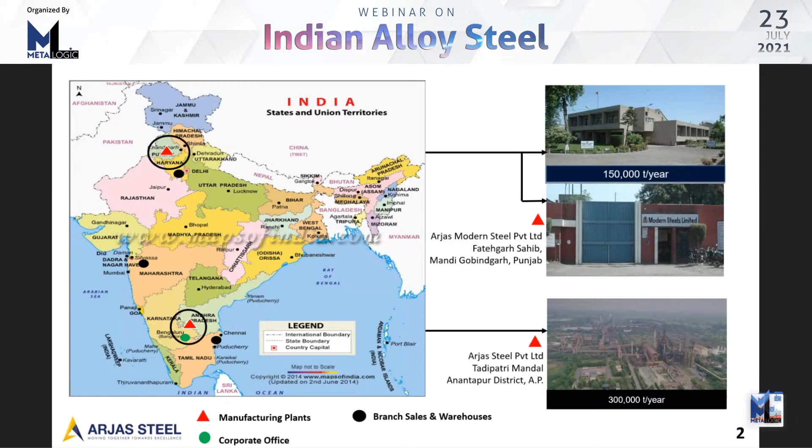So we use scrap as the raw material. Combined, although both plants are not yet at those levels, the rated capacity is close to 450,000 tons. Combined, we have a range of products—some overlapping, some unique to each plant—including rounds, RCS, hexagons, ingots, bright bar, and heat-treated bars.

Combined, we have about 2,500 people.

As is required for this business, we need to have strong systems-oriented ways of working. So we have all the typical systems you would find in most companies, either our customers or our peers—good management systems, traceability, quality, root cause analysis. Increasingly, in the last 2 to 3 years, we've been increasing the amount of digital solutions to make our business more efficient.

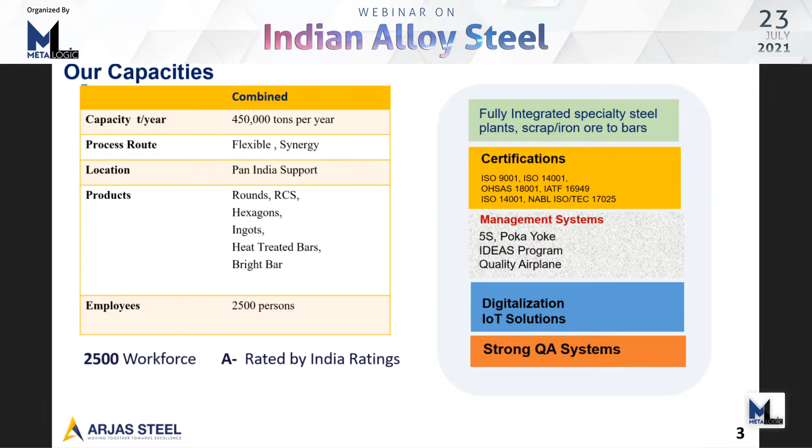In different areas, we have implemented IoT solutions which tackle specific problems in operations. Coming to products, you can see some of the products that we make.

We have a range of products. Of course, we don't cover the entire range of what the alloy steel world is—that's due to some technical and other limitations, but increasingly our aspiration is to grow that profile. On the right, you can see some of the applications where our steels go.

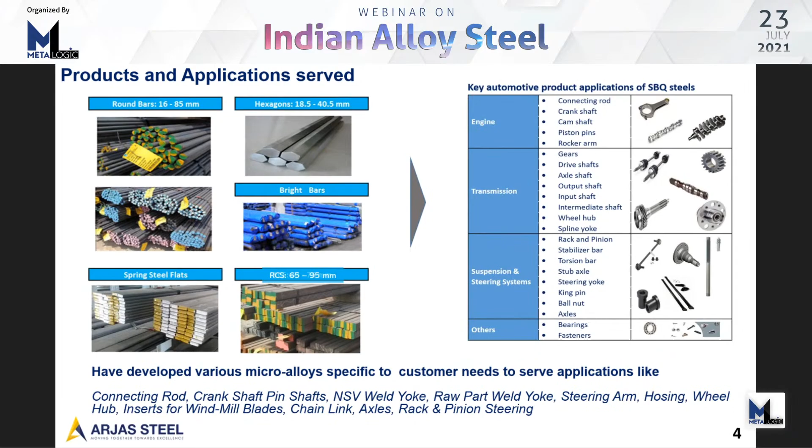Apart from automotive applications, we also have wind energy, certain foundation bolts, and some other engineering industries like textiles where we have special steel needs. This is going to increase as India gets more quality conscious and products become more sophisticated—alloy steel applications will increase across metros, infrastructure, etc., and defense.

Coming to the industry, give or take, India produces 100 to 120 million tons of steel, and year on year we vary between 80 to 120 depending on the situation. We export and import approximately equal amounts—around 9 million tons of exports and about 7 million tons of imports. The last couple of years have been fairly good from an import perspective because we have brought in minimum pricing and certain protection for the local industry.

So we are to some extent shielded, but more than that, globally steel is going through a good cycle. In all the countries that typically imports come from, prices there are also equally attractive, so import of steel is less. But in a little difficult market condition, there's a lot of steel that finds its way to India.

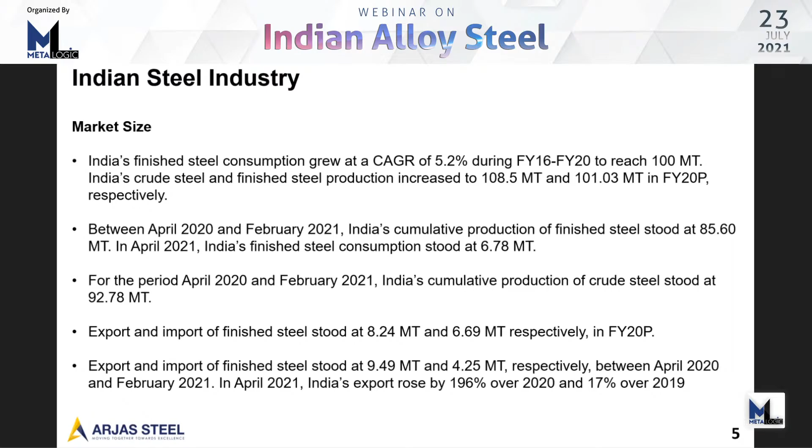Among this 100 odd million tons, roughly 4 to 5 million tons, probably closer to 6 now, is what we call special steel. This covers also a little bit of stainless, also alloy steel flat products. So if you take the products that we have—I have another slide that talks about that—we are talking about 4 to 5 million tons. Now, in the last few years, the government has been fairly proactive.

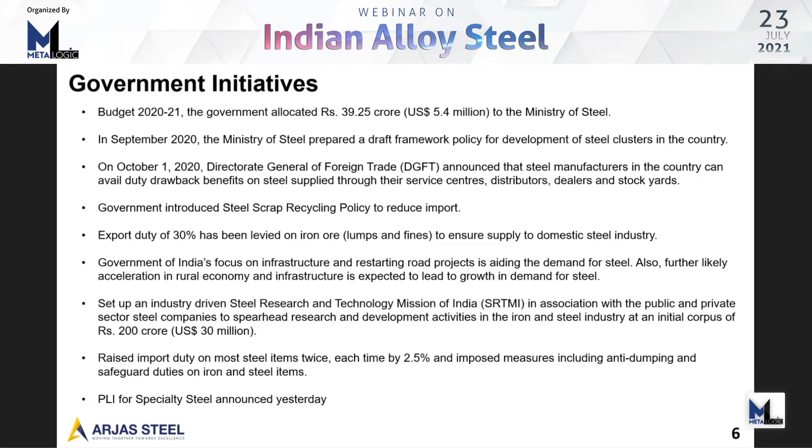I think there are other speakers who will talk a little bit more on the policies, but definitely they have been consulting with the different industry associations and taking proactive actions to promote local production and local consumption, and also go up the value chain. Among these, the two most attractive policies from an alloy steel perspective are the emphasis given through SRTMI on developing R&D activities to improve our product development capability, and secondly the PLI scheme announced yesterday, which talks about import substitution. So essentially these two are good building blocks. The rest, export duty, import duty, are more tactical and can tomorrow go away, because we do have to adhere to World Trade Organization and other principles.

Coming to the market, definitely the automotive market - what you see in the red line is last year's monthly trend, and in the blue line above that is the current year, April, May, June, 3 months. We are trending well above last year's numbers, and if you see last year's numbers overall we have done well, especially the last second half, compared to even 19-20.

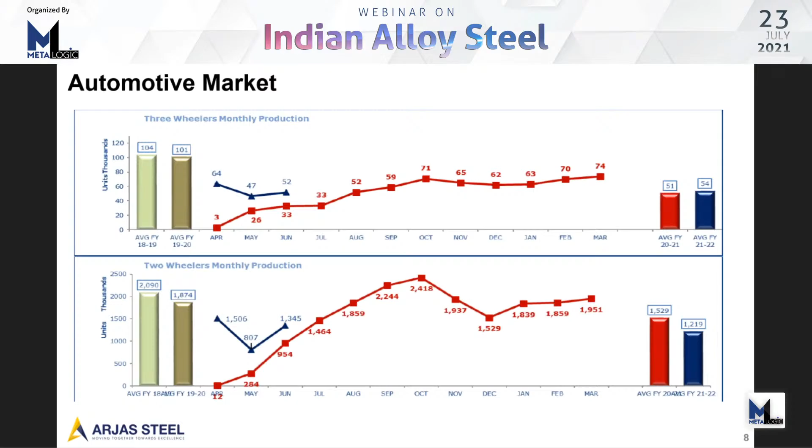Commercial vehicles has been a little slower off the mark, but as economic activity improves, we expect commercial vehicles to accelerate. Three-wheelers, which is predominantly an export business, has to some extent been impacted by the lockdowns and closure of schools and tourism, and is not doing as well as two-wheelers, which has performed extremely well. This year as well, after the dip in May, it has again bounced back. So we are seeing very good traction in the auto sector, especially PVs and two-wheelers.

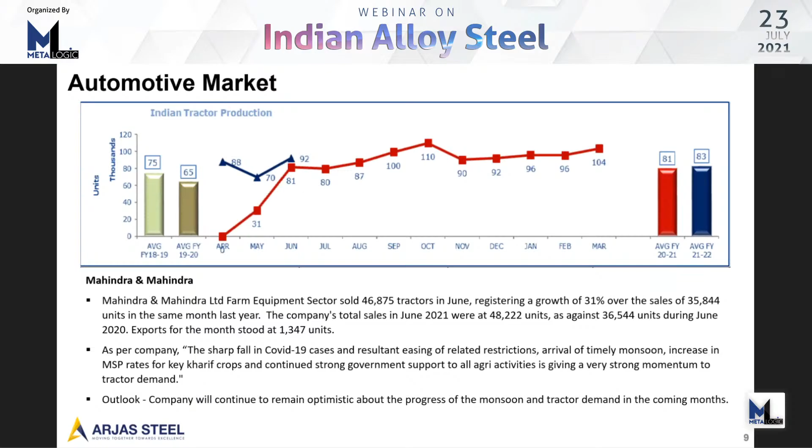The farm sector has been extremely good, and tractors has seen phenomenal growth month on month. Last year was a very good year, and this year is continuing to be equally attractive as rural demand picks up, and rural urbanization and rural transportation also happen with tractors. Tractor is no longer just an agricultural application, it's also being used for multiple other purposes.

So the Indian SBQ market that we are in is 4 to 5 million tons. Half of it is automotives, energy - mainly wind energy but also boilers and energy systems - and off-highway vehicles, not only tractors but also earth movers and other equipment. Railways is a smaller portion, and defense is even smaller. But generally speaking, in all these sectors we have strong policies in place, and as long as we are not hit by further pandemic shocks, I think we are in for a good run.

Energy sector, again, there's been a lot of thrust, both in generation and in transmission, and the current budget forecasts a good amount of expenditure in these areas. We are already seeing in energy a significant benefit from power availability, but in the transmission areas we do have certain issues, especially in Punjab, where we are experiencing some difficulties, but by and large this is expected to improve. Along with that, you will have growth in special steel requirements as well.

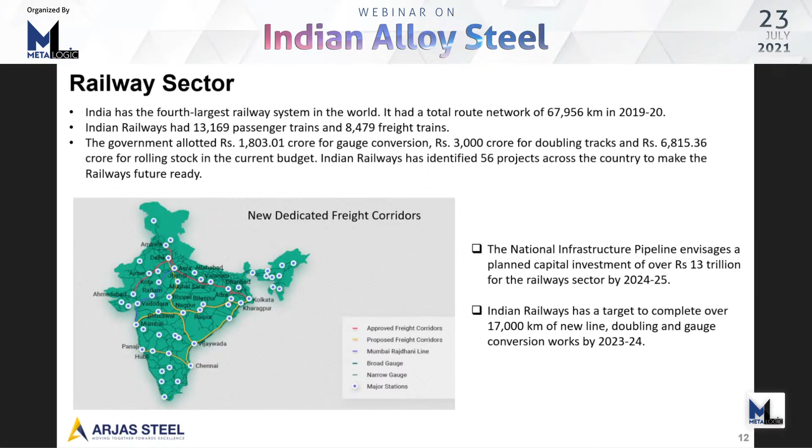The railways, again, is on a growth phase, both in terms of coaches as well as the springs and other things required for the coaches, where our special steel will go. There's an ambitious target to expand the coverage of railways, new railway lines, and also doubling, and also going to high speed.

Sorry to interrupt, you have 1 minute to go, sir.

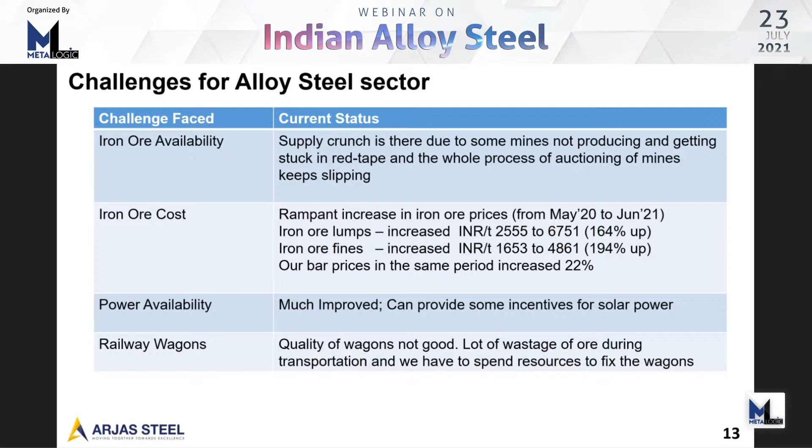Sure. So in terms of challenges, there are definitely challenges in terms of availability and pricing for iron ore, which is one of our important raw materials, and also scrap. You can see raw materials have jumped by over 100%, and the finished products have gone up only 22%. Although it may seem there have been a couple of increases, in real terms the price increase has been only less than 25%.

What we look for in this alloy steel sector is we need more forums like this to exchange best practices, and we also have a shortage of skills in certain areas. We need upgradation of that. And in terms of digitalization, we need to educate our workforce as to what are the potentials out there.

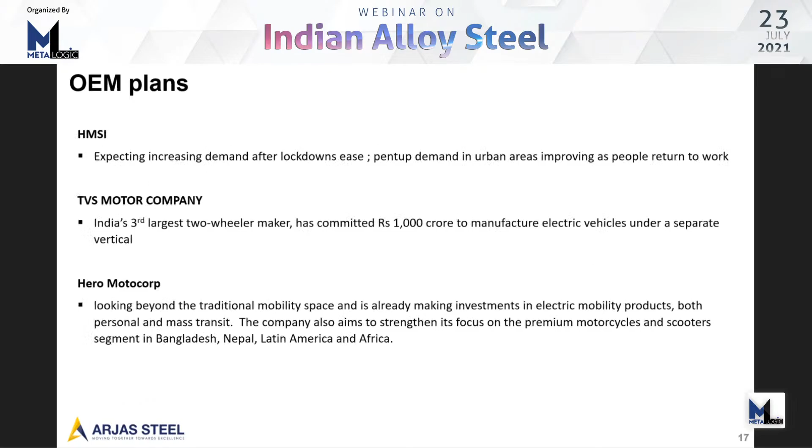I have a few slides here on various OEM plans, which I'll be sharing later on through Metalogic. But I'll just come to this last page. So the positives are it looks good in the short term, meaning 21-22 year. We are looking at a good year going forward. We are also looking at these initiatives given by the government, which should encourage new capex to come in.

And of course, the worries that we have are the pandemic. It's still not out of our system. And this is also impacting the supply chain, as well as the availability of raw materials is an issue. And of course, prices - how much of that we can pass on to the customer is also a concern. But overall, I would say on balance, we are looking at a good couple of years. And if we can manage our operations well, I think we are in for a good run.

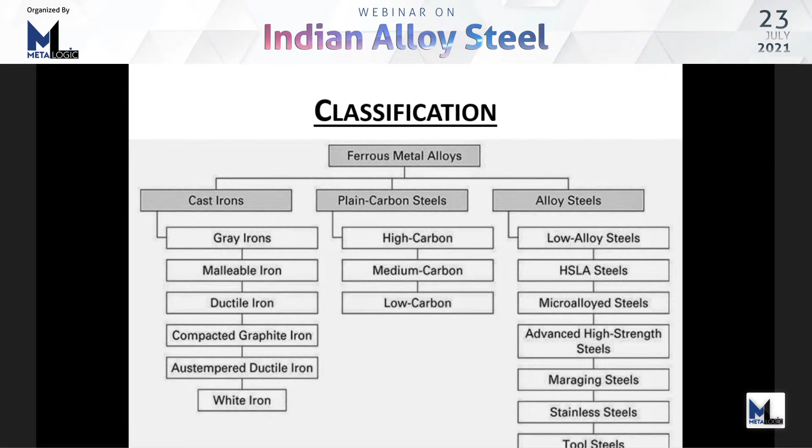This audience is well known about alloy steel. In fact, alloy steel has a wide domain, right from carbon, which is also called an alloying element. And if you see the category, it even includes cast iron, which can be termed an alloy steel. But what we are discussing is the extreme right-hand side: alloy steels, mostly low alloy steels, high strength alloy steel, then micro alloyed steels. So a lot of changes have come in the alloy steel category, and that's why this topic has become very interesting and a very high value area also.

Let's run through the applications of different alloying elements. Today when we talk about steel, whether primary or secondary steel manufacturing, mainly the basis is that alloying elements have given a big thrust to the application of steel. Some of the important alloying elements are tabulated here, and it broadly shows what changes they give in the properties.

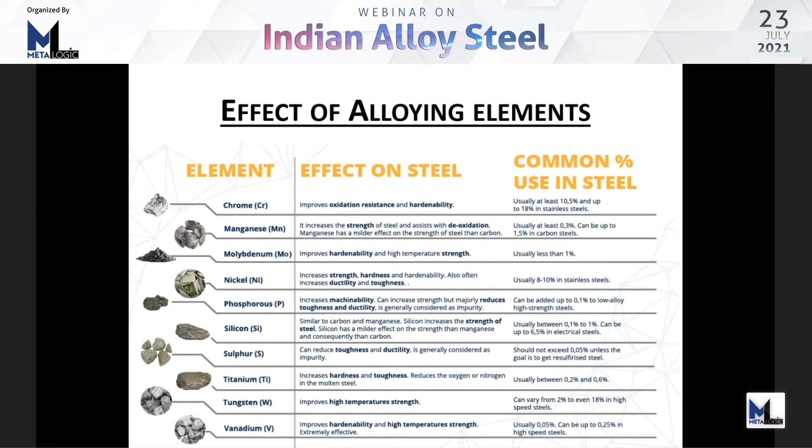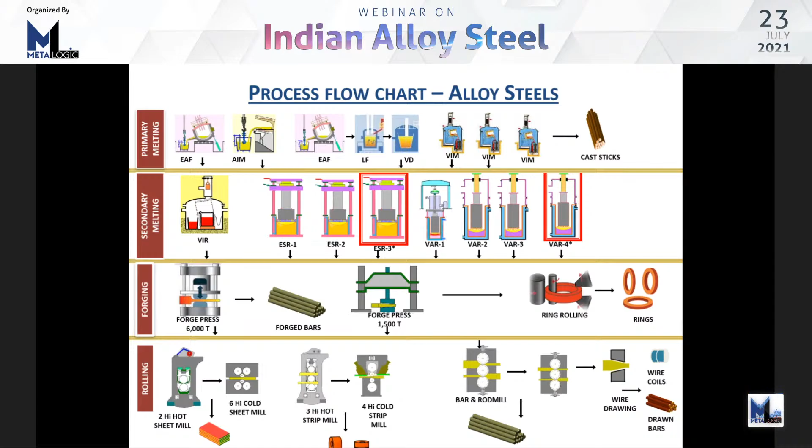Very broadly, this process flow chart I have shown here includes electric arc furnace, vacuum induction melting, air induction melting, followed by different types of VIM, then VAR, and then the downstream process of manufacturing, which is also very important—what process you follow, what is the heat treatment process. So these things are already shown here, and we have tried to cover the entire primary melting, secondary melting, forging, rolling. All I am trying to focus on here are the very specialized grades of steel which have applications in space, defense, aerospace, and other strategic applications.

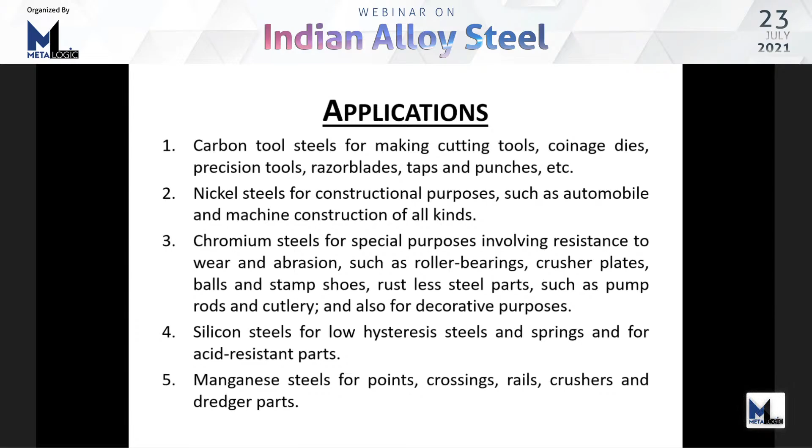As already given by our previous speaker about the different applications, I'm not going into that category, but broadly, the areas where the commercial applications go for, we start from tool steel, then construction purposes, then automobiles is another major application area. We also have certain steels like chromium steels used for roller bearings, and some for crusher plates. So what we are trying to see here is that steel has such tremendous applications, from very small cutting razor blades to very high-end applications, which makes steel very special. As you will see from different speakers, its importance and application is quite big across different segments of our manufacturing industrial process.

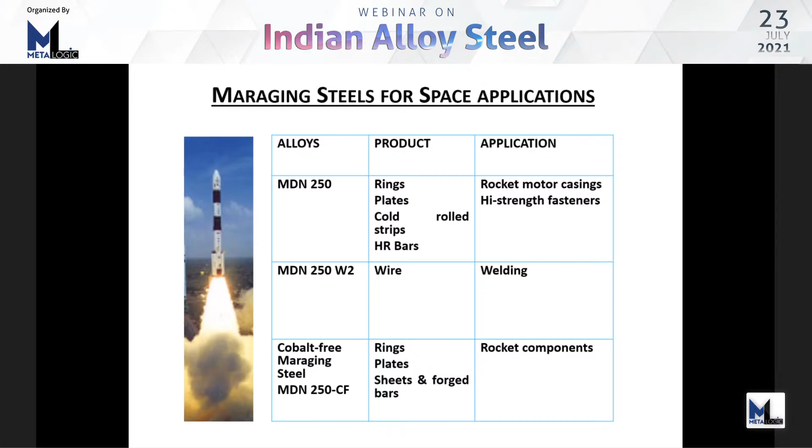Similarly, focusing on other grades of stainless steel—if you see the stainless steel category, right from austenitic, martensitic, precipitation hardening, to ferritic, all these different domains of steel have different applications which drive our entire space program using this variety of grades. But whatever grade I have mentioned may look very simple, yet the required properties are also very unique, calling for special techniques in melting, thermomechanical processing, and heat treatments.

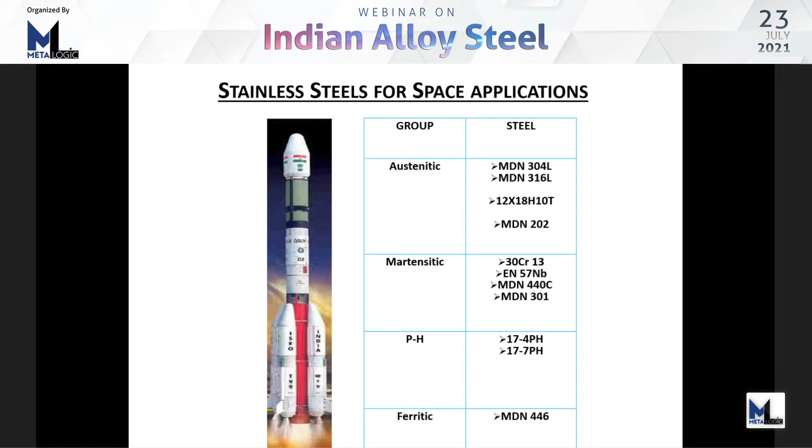Coming to another important segment of our defense program, if you see all the missile applications, again steel has a very dominant role to play. Right from Agni, Prithvi, and Akash, wherever these missile casings are used, we have applications of very high strength MARAGING steel for rocket motor casings and all. So is the case for BrahMos and the Akash missile, where the application of special steels is very much there, and this calls for very unique properties in the steels.

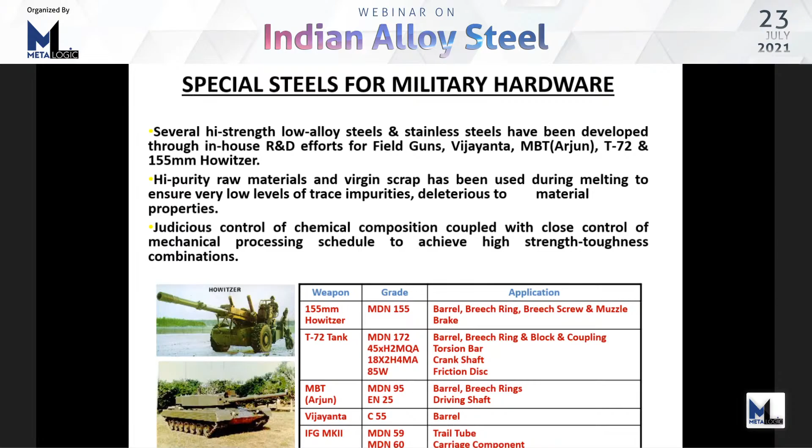Coming to military requirements, for the tank barrel itself there is a very unique alloy steel, and this also applies for T-72 tanks—right from the torsion bar, crankshaft, friction disc, everything, even the very simple grade of EN25 has very unique property requirements. The same is the case for trail tube and carriage components; these are all used for very unique applications. Coming to protection for ballistic applications, again we depend on very unique properties of steel, and some of the grades mentioned here, DMR 45, find very unique applications. It is basically an ultra high strength low alloy steel, with very stringent requirements regarding cleanliness and resistance to lamellar tearing against bullets.

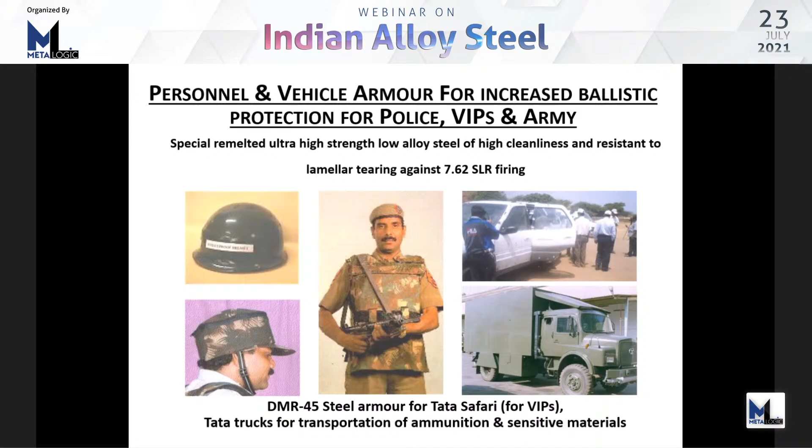Coming to the strategic applications, there are varieties of grades used for the different components, which has been shown here.

Not only components, but even for the welding part, the welding grade steels are very unique, and it calls for a very unique process in manufacturing, right from the primary melting, secondary melting, refining, and then the process of processing.

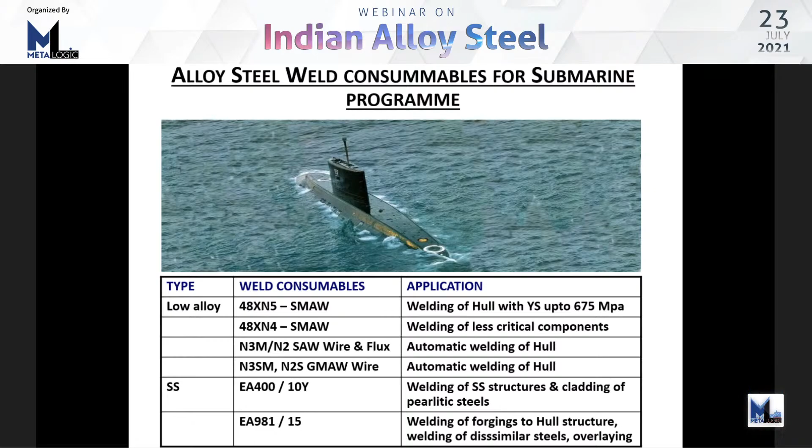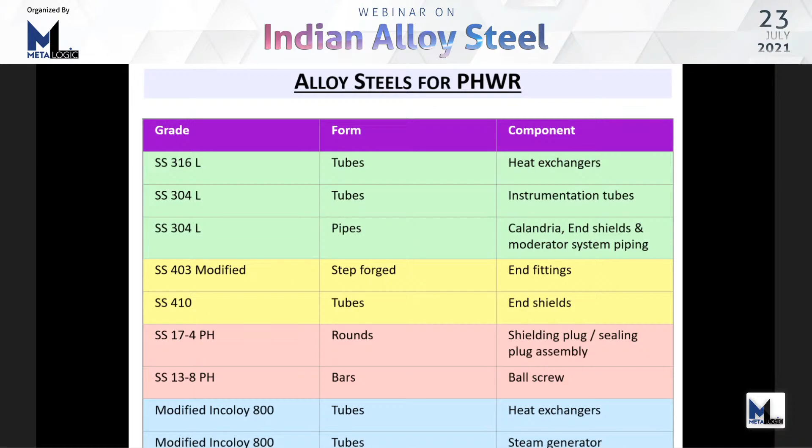Similarly, for nuclear applications like our pressurized heavy water reactors, the various grades are mentioned here. You can see right from the normal 316L, 304L - even though it looks simple, their properties and processing are very unique because the reliability of the components should be of the highest standard, as well as free from certain elements like cobalt, because it goes for radioactive applications.

Similar is the case for 316LNL - the grade requirement is very unique there. Then 321, then we have 304 nitric acid grade steel - even though it is 304, its control of chemistry is very unique, and it has a very special application in fuel recycling.

And so is the case of MARAGING 350, again for the PFBR, prototype fast breeder reactor, which requires a very unique property in terms of resistance against high radiation dose. That is where you find a lot of requirement of modified 316Ti, in the form of D9, and of course 316LN.

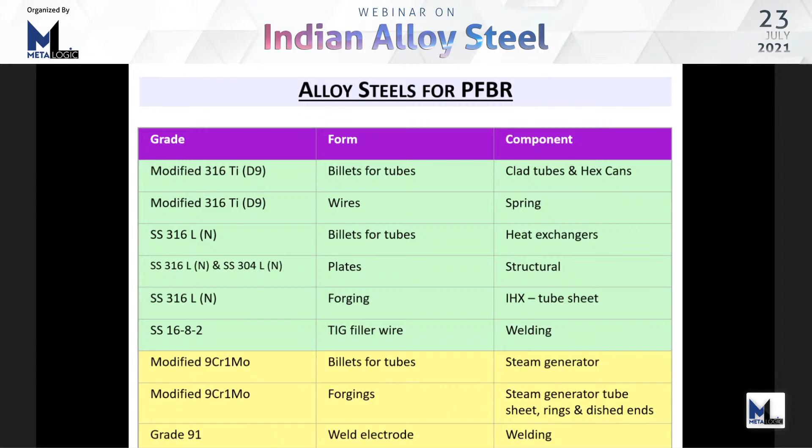So a lot of grades. Then another one is the 16-8-2. Then for billets, for tubes, for a steam generator, 9 chromium 1 moly steel, grade 91 welding electrodes. So you can find everywhere the steels are unique, and also the alloying elements will be different in those requirements.

And I have put it for the fusion reactor. This is also a very unique program where indeed the steel has to play a role of neutron shielding, with a grade called 304L boron. So boron-modified steel is there, where by adding boron in the steel, high content of boron, these properties can be met, but this requires a lot of challenge in processing, because once we put boron in the steel, its workability becomes a different type of requirement, which calls for a special process.

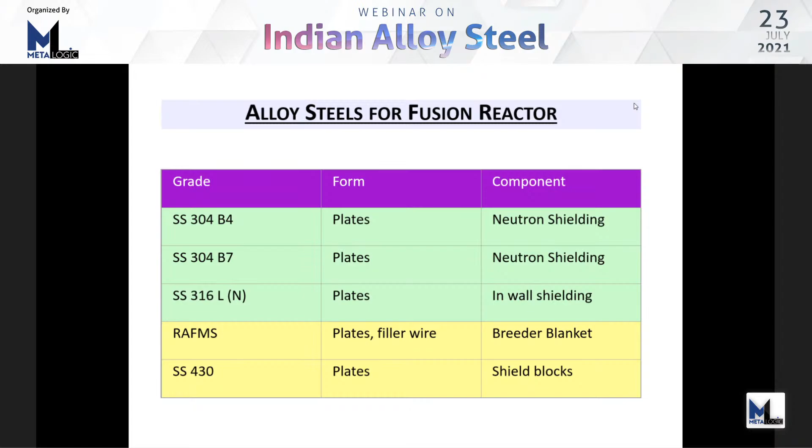Another one is RAFMS steel - they're all microalloyed steel, with a lot of control in chemistry. And again, fusion reactor is a unique type of reactor, and you can see a variety of alloying steel here.

Whatever I have mentioned so far, all those steels shown here are basically indigenized, and you can say it is almost Indian alloy steel. A lot of modifications have been done in terms of chemistry, processing technology, and heat treatment, and that's why we call it a total indigenous development.

Similarly, for the power sector, MIDHANI has done a lot of work, and these grades have been developed - you can find almost a dozen grades, right from austenitic stainless steel to martensitic, ferritic. So a lot of developments are there, and some duplex ones as well.

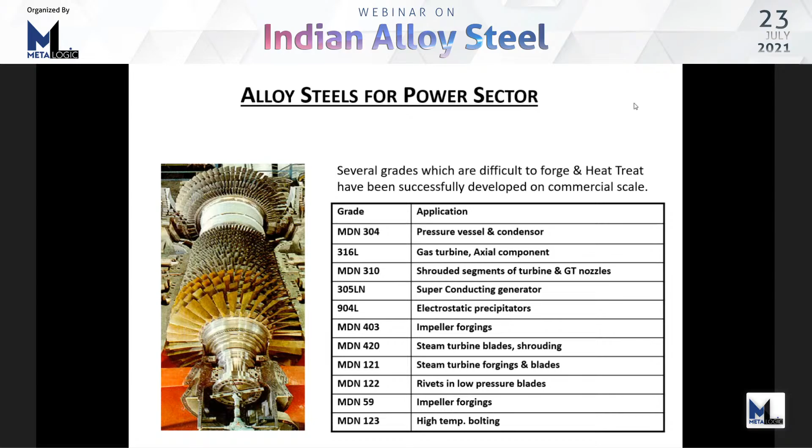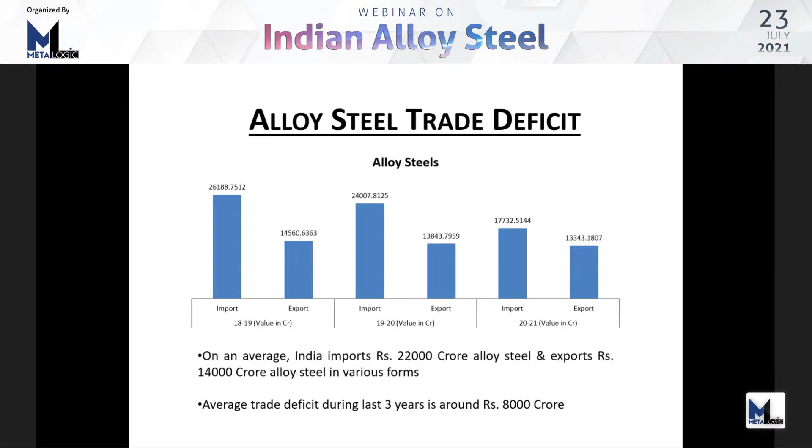In spite of making so many grades in our steel production, I want to put one data point here: even though, if you see the last 3 years average, we have imported almost 22,000 crores of alloy steel per annum, our export is also 14,000 crores, but a deficit of 8,000 crores is there. I am sure our primary steel sector is very strong, and it is possible to enter the secondary steel sector too, and bridge this gap of 8,000 crores. Rather, we can become a net exporter of alloy steel, as there is a lot of potential in the international market, at least in defense, aerospace, and other strategic sectors.

Just showing the same data here again.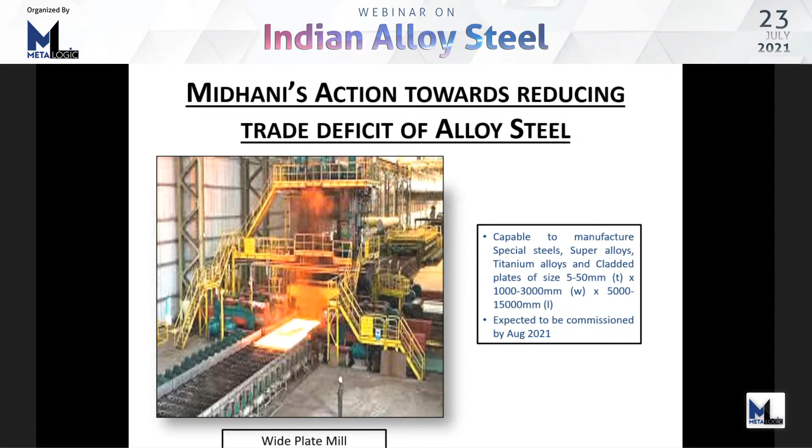Among the total imports, what we have tried to analyze is that mainly stainless steel flat products are imported in bigger, higher widths. And that is where I said it is possible to bridge the gap. We have already set up a wide plate mill of 3-meter width, where we can roll various grades of alloy steel, super alloys, and titanium grades.

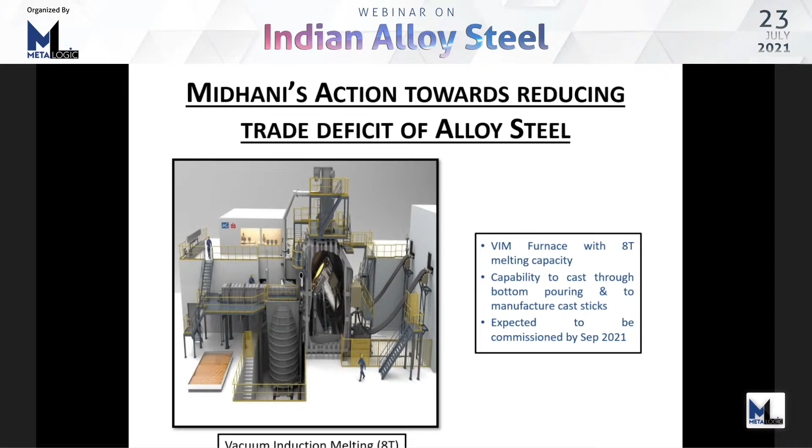As already pointed out, the PLI incentive scheme for alloy steel will really help us and will also improve India's performance in the export market. This will be a good value addition for the country in terms of indigenization of special steel.

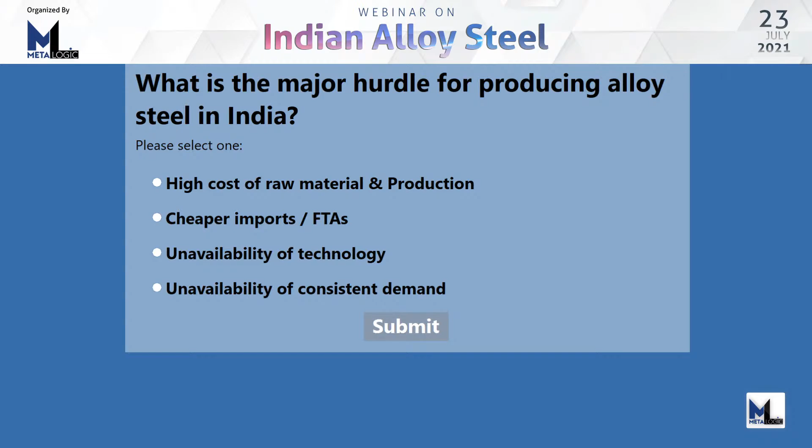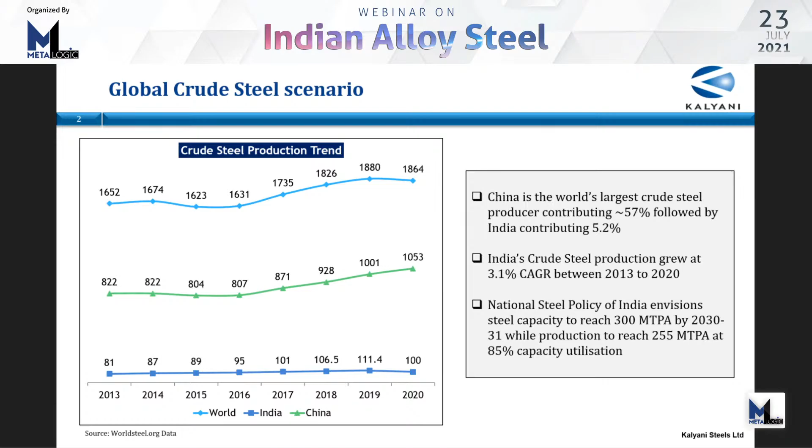There are two aspects to this. One is that the growth over the last 7 years was less, so we should not expect much higher growth. But given the situation in our country today, the ambitious plans to produce around 255 million tons by 2030, the way government is supporting manufacturing, and the PLI scheme that has come in, Indian steel industry will grow much faster than it has over the last 7 to 10 years. So we are going to have a good time where the industry grows much faster compared to the past and compared to most countries globally. India may even supersede the growth rate of China.

Another important point is that we have a minuscule total consumption of engineering steel long products, not including flat products, compared to what is consumed globally. We consume only around 4 million tons of SBQ quality bars, and besides that, around 1.2 million tons of wire rods, which is largely used as engineering steel. Of course, wire rods are used for several other applications as well. Major part of this engineering steel is used in our country by way of forging, largely in the auto industry. Now, out of this 5.2 million tons, if we look at the growth of auto industry during...

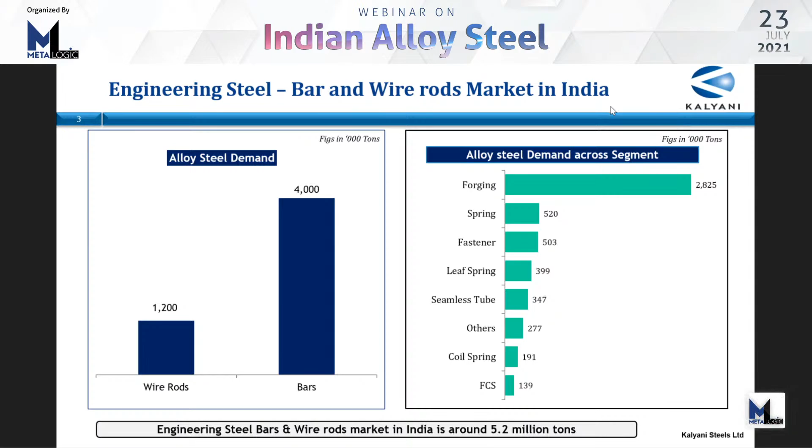Sorry, I lost my presentation. Your presentation is visible to us. You just need to click on the screen and move the cursor left and right. Do you want me to make you presenter again? Yeah, just please, one second. Are you able to see your presentation now? No, I'm sorry, no. Sir, can you open it once again from your system? Okay, yeah. Sir, it has vanished once again when I click show my screen. So is it visible to you? No. Okay. Let me try again. Yeah, but the moment I try to change...

One key important application, as I mentioned, is automobile production, where we consume almost 60 to 70% of engineering steel or SBQ quality steel. Out of that, a good portion is consumed in passenger cars or passenger vehicles as well as two-wheelers. If you look at the production, we produce around 20 to 25 million two-wheelers and close to 4 million passenger vehicles. Of course, in the last couple of years, because of the pandemic and lockdowns, total production has gone down. But if you look at EV sales till now, there is hardly any penetration, negligible production whether it is two-wheelers or four-wheelers. But that is not the situation which is going to remain.

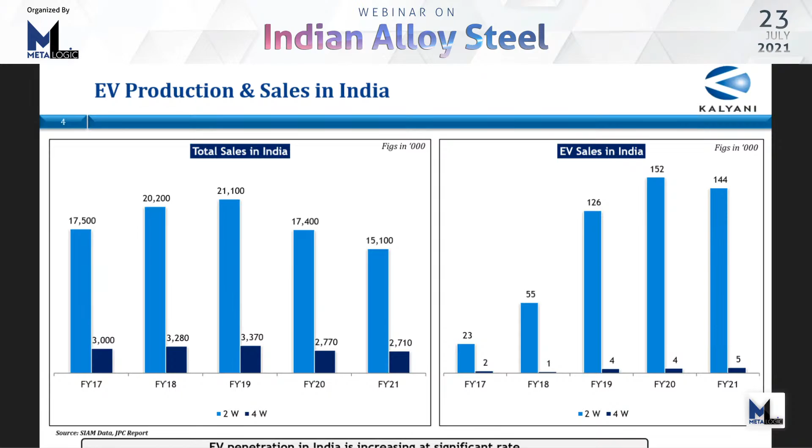So if you look at EV production and sales in the country, as I mentioned, till now there is not much happening. But going forward, these are the projections by SIAM. By financial year 25, total production of two-wheelers is likely to be around 18 million, not as much as before, and for four-wheelers it is only around 3.2 million. But if we look at EV production of two-wheelers, it will be almost 30% of electrical vehicles, and for four-wheelers, it will still be 7 to 8%. By 2030, EV two-wheeler production will be almost 70%, and EV production of four-wheelers will be almost 1/3, or around 30%.

This indicates that the major part of engineering steel consumed by these two sectors, two-wheelers and four-wheelers, is not going to grow. If you look at total consumption growth for four-wheelers by 2030, it will get stabilized with not much growth, and subsequently degrowth will start. As far as two-wheelers are concerned, degrowth will start now, and by 2030 we will have only 75% of the requirement that exists today.

Similarly, for commercial vehicles, if we look at passenger vehicles like buses, most city buses and intercity buses are going to be electrical. As for long distance buses, they may still continue to be based on IC engines. But slowly, as this sector is the largest consumer of engineering steel, the demand will stagnate and then start going down slowly.

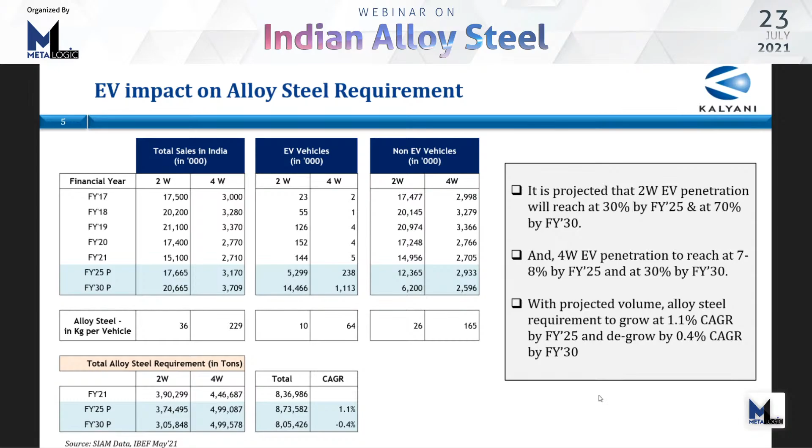Now, this only indicates that we really need to focus, as manufacturer, on non-auto sectors, and there are plenty, where the growth rate is very high, whether it is engineering, defense, energy, aerospace, or space. These are the sectors which are growing anything between 15 to 30%, and we need to set up facilities for catering to these sectors.

As Saarloha, we have already set up fairly large facilities to cater to these requirements, like besides having an electric arc furnace, a blooming mill, a very large rolling mill, we have secondary remelting facilities like vacuum arc remelting, 2 ESRs, and we are already approved by most of these customers and catering to this growing requirement. MIDHANI is a pioneer in this, doing very large volumes, but slowly our volumes are increasing in this direction.

At the same time, there are commodity steels which are required. We have an integrated steel plant as part of Kalyani Steel in Hospet. There again, we are increasing capacities for taking care of requirements of different sectors like powertrain, bearing, seamless tube, which are largely going for the energy sector and all. So the focus is shifting, and needs to shift from auto to rest of the applications, and that's where the alloy steel demand will move. Thank you.

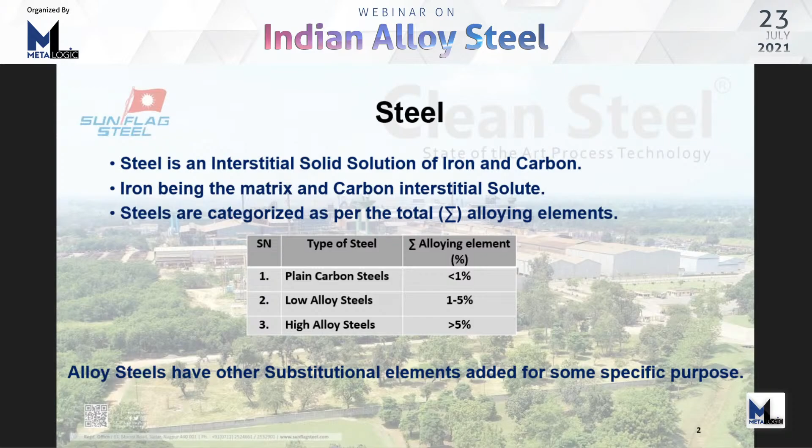Iron being the matrix and carbon being the interstitial solute. Normally, the classification of steel is such that if the total alloying elements are less than 1%, it is called plain carbon steel, little bit here and there is okay. Lower alloy steels are 1 to 5% total alloying elements, and high alloy steels are more than 5%.

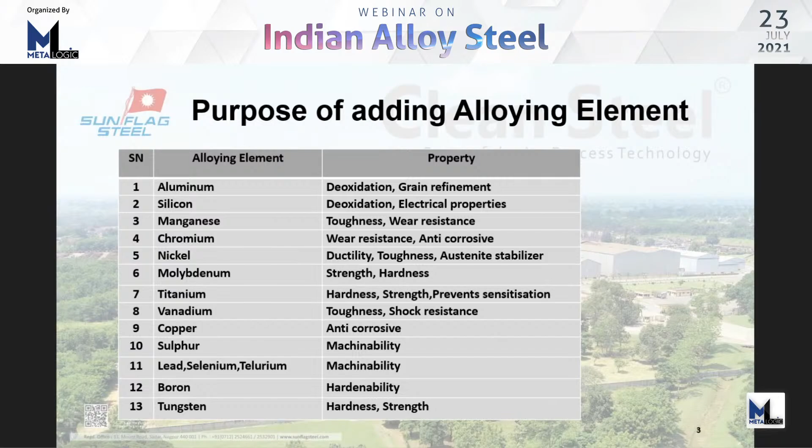Some of the substitutional elements are added for the following reasons: for example, aluminum for deoxidation, manganese for toughness, chromium for wear resistance, and moly for strength and hardness, and so on.

I will be covering here the following grades: low alloy steel, construction industry steels, automotive industry steels, high strength low alloy steels, defense application steels, oil and gas industry steels, energy sector steels, tool steels, valve steels, stainless steel, maraging steels, super alloys, and clean steels.

Now, for most alloy steels, the engineering component requires good response to heat treatment, which is to develop hardness up to required depth. Hardenability is the capability to develop through-hardness and is a function of composition. While for a grade, the specified composition range is broad, much closer tolerance is required to ensure hardenability.

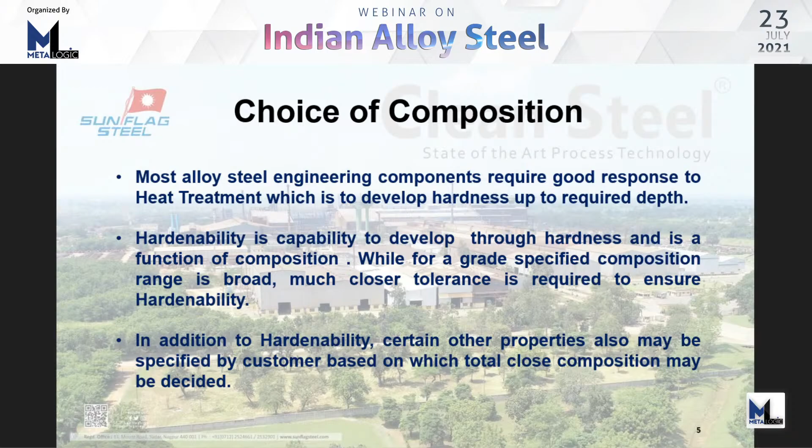Carbon plays an important role as alloying elements form carbides with carbon, which alter hardness and ductility. The shape of carbides influences properties like hardness, ductility, and toughness, and the loss of carbon due to thermomechanical treatment is termed decarb, which is undesirable.

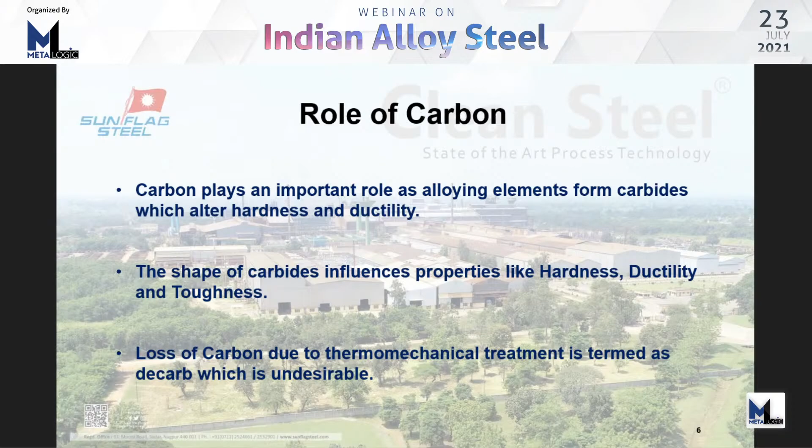The types of alloy steels: low alloy steels have 1 to 5% total alloying elements, and high alloy steels have more than 5% total alloying elements. Stainless steels, tool steels, valve steels, and super alloys are all high alloy steels.

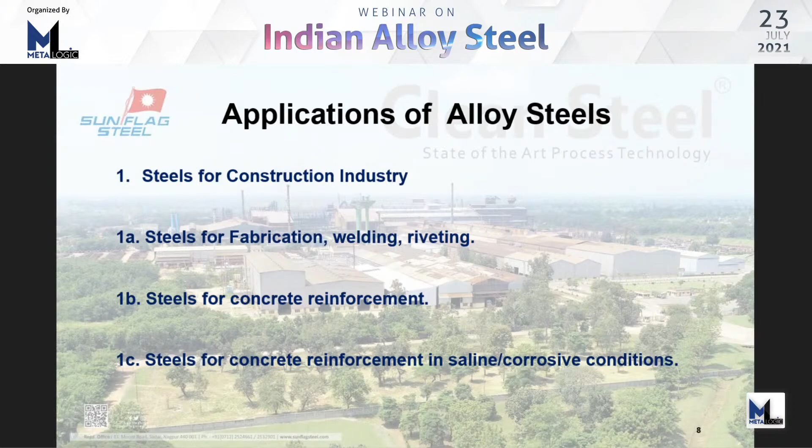Applications of alloy steel, for example in construction industry, there are 3 types: steels for fabrication, welding, and riveting; steels for concrete reinforcement; and steels for concrete reinforcement in corrosive conditions.

Now, this is the first one, the fabrication steel. It is hot rolled, medium, and high tensile, and flat products being plates, strips, flats, and bulb flats, sections, beams, channels, angles, etc., long and square bars, welded, bolted, and riveted structures.

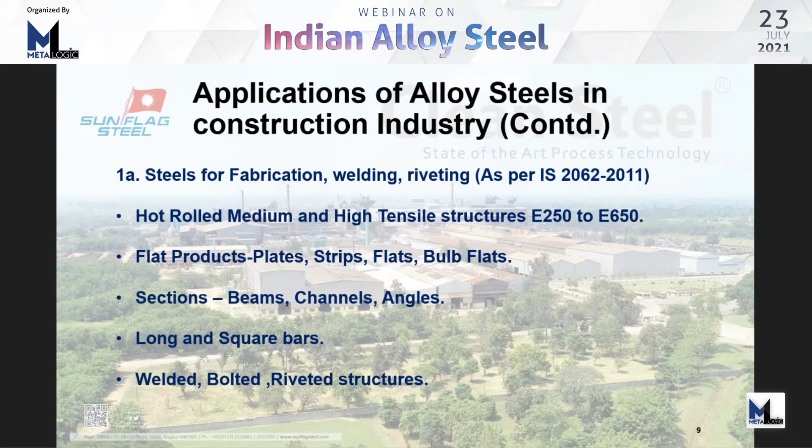For the concrete reinforcement steels, there are 4 criteria: carbon equivalent, 0.2% proof stress, percentage elongation, and bend test. These are the parameters on which the properties will work, and it will be certified under the names of FE 415, 500, 550, and 600, the suffix being the 0.2% proof stress.

This is a similar requirement, but only in this case it is stainless steel because it is a corrosive environment.

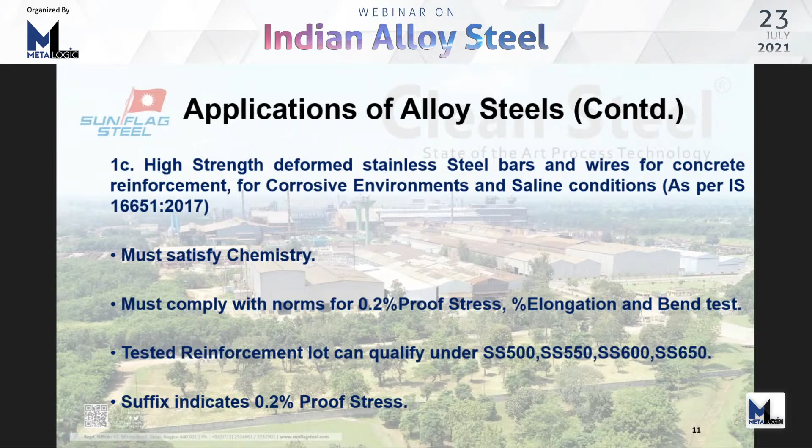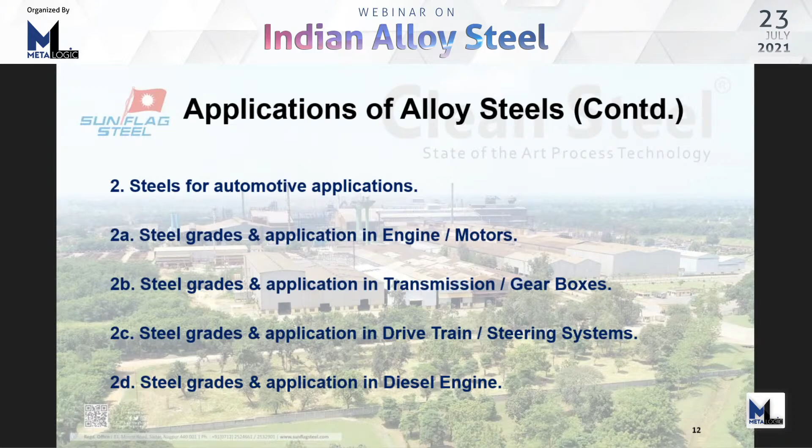Now, steel for automotive applications are normally engines, motors, transmission, gearboxes, drivetrains, steering systems, and diesel engine parts.

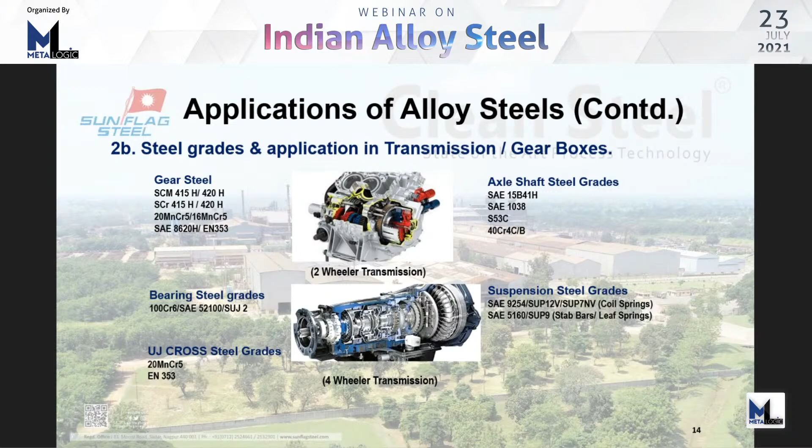Also for transmission and gearboxes, gear steel, bearing grade steel, UJ cross steel, axle shafts, and suspension. For drivetrain and steering systems, rack and pinion system, front axle beam, steel for drives, stub axle again.

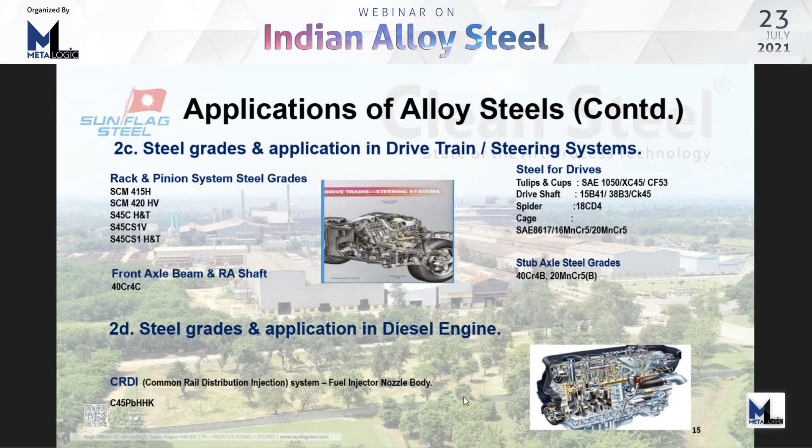Now we come to high strength low alloy steels, also called HSLA steels, normally having low carbon, manganese between 1.5 and 2%, and less than 0.1% of elements like niobium, vanadium, titanium, moly, zirconium, or boron.

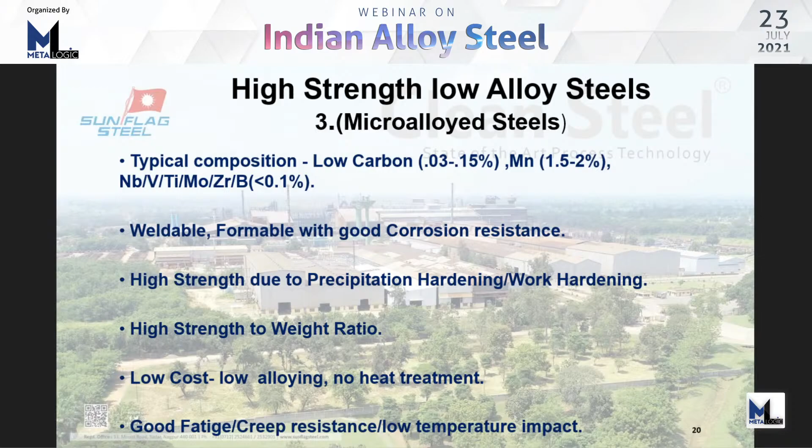They are weldable, formable, have high strength, high strength to weight ratio, and low cost because of low alloying and no heat treatment. It has good fatigue properties, creep resistance, and low temperature impact.

The applications of HSLA steels are in oil and gas pipelines, heavy-duty vehicles, storage tanks, transmission towers, mine and railroad.

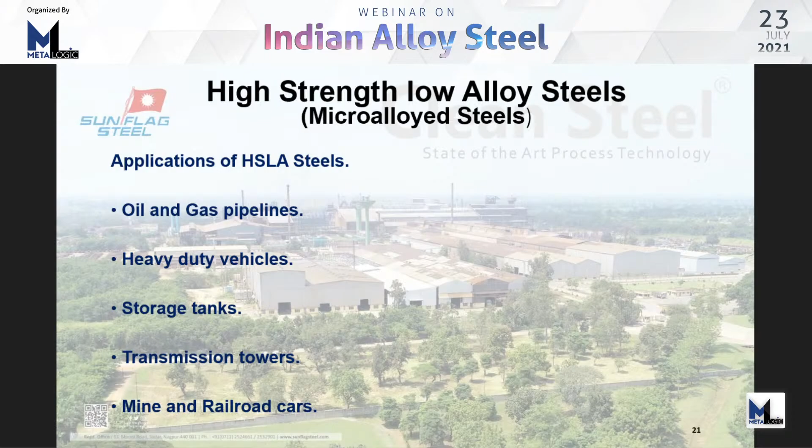For oil and gas, we normally require high strength steel with high resistance to corrosion, with the structure being mostly tempered martensite, and chrome moly or chrome nickel moly alloy steels take care of these lean applications.

Whereas for higher end applications, martensitic stainless steels, precipitation hardened stainless steels, and duplex stainless steels take care of the application.

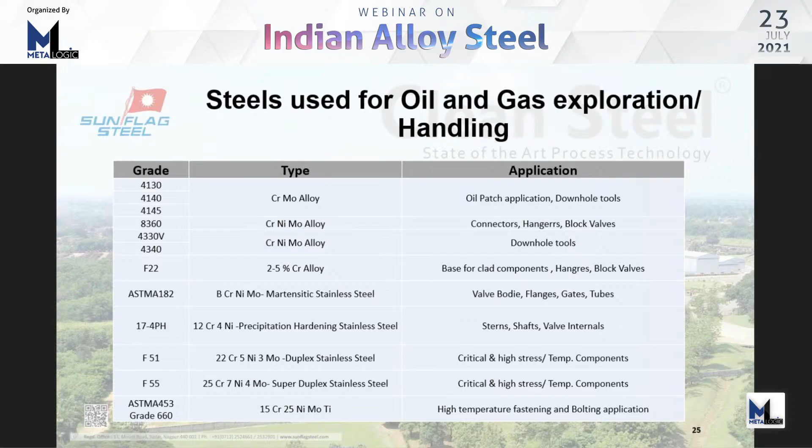These are some of the applications in the oil and gas industry. The upper ones are the lower end applications, the bottom ones are the higher end applications. You can see the upper ones are mostly low alloy, while the lower ones are stainless steels.

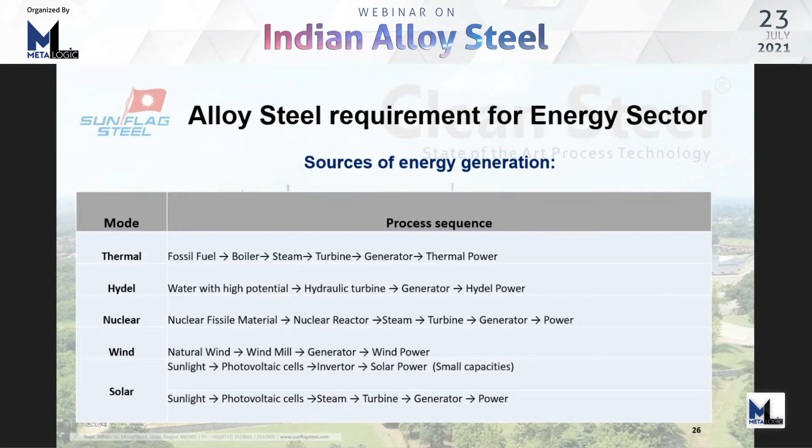Now next we come to the energy sector. In this table, the process sequence for each mode of energy generation is shown: thermal, hydel, nuclear, wind, and solar. But the steel requirement is only for three major parts of these process requirements: one is for boiler, the other is for turbine, and the third is for generator.

Tool steels are high quality steels made to control chemical composition, processed to develop properties useful for working and shaping of other materials. The carbon content in tool steels may range as low as 0.1% to as high as 1.6%, with alloying elements being chromium, moly, vanadium, and tungsten.

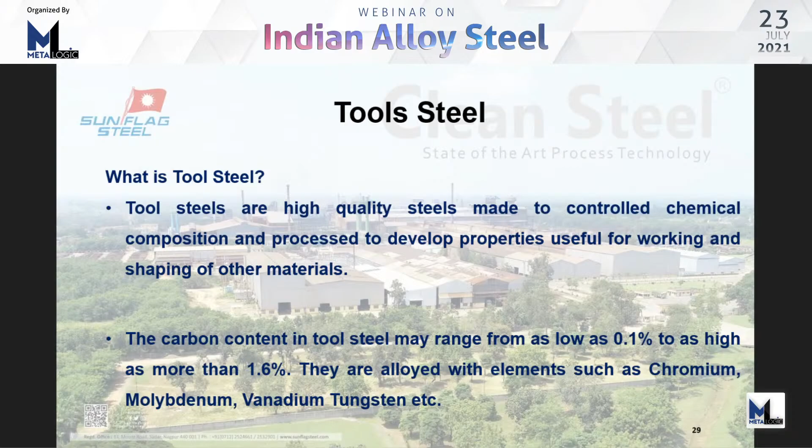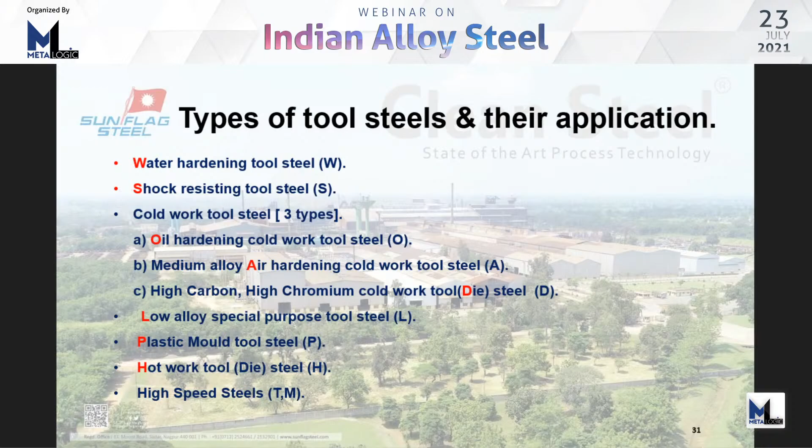Normally, tool steels offer toughness, wear resistance, hardness, and heat resistance. The nomenclature in tool steel is such that the application denotes the name. For example, water hardening tool steel as W, shock resisting as S, oil hardening as O, and so on.

The role of elements: hot hardness is imparted by tungsten, moly, cobalt, vanadium, chromium, manganese. Wear hardness by vanadium, tungsten, moly, chromium, manganese. Hardenability by manganese, moly, chromium, silicon, nickel, vanadium. Minimum distortion by moly with chromium and manganese, and toughness by vanadium, tungsten, moly, manganese, and chromium.

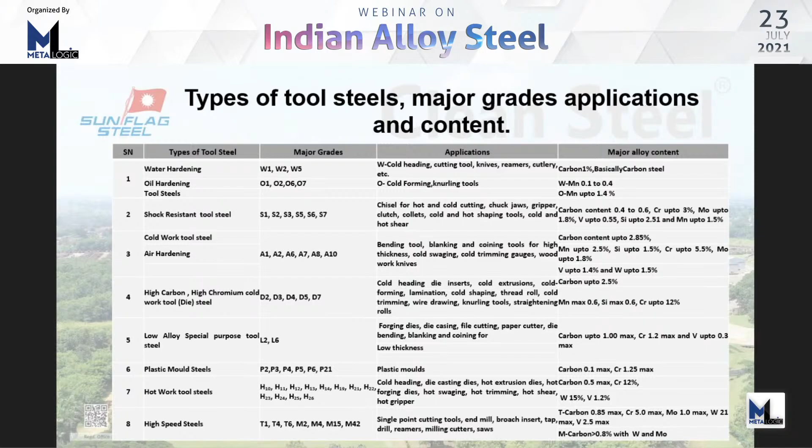This is a table which indicates the types of tool steels with major grades therein, with applications and major alloying elements. I will not read this because of paucity of time.

Now next we come to engine valve steels. It is one of the most critical and precise parts of any IC engine, and the valve is the device to open and close a passage.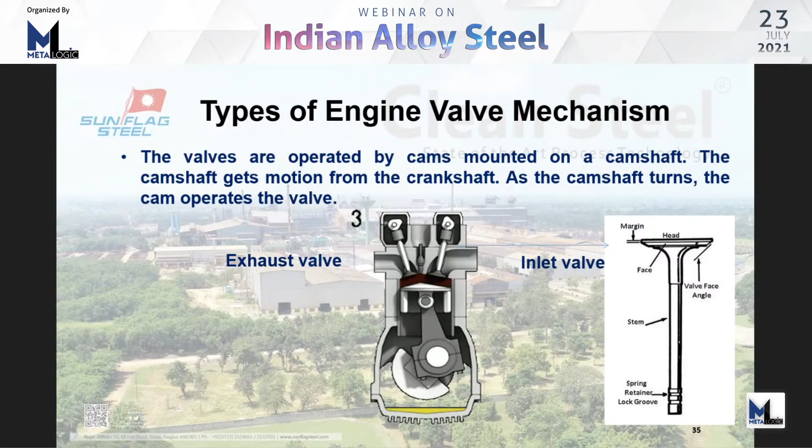In this, the animation shows the firing sequence and the operation of exhaust and inlet valves with the picture of the valve steel item. Now there are two valves, the inlet valve being less critical as compared to exhaust, because the exhaust is subjected to very high temperature. So obviously the steel choice is accordingly.

Now these are some of the chemistries which are given here of engine valve steels.

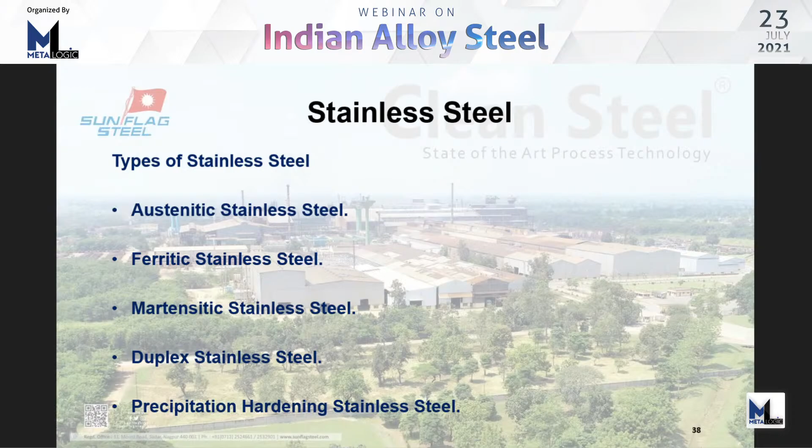Now we come to stainless steel. The types of stainless steels are austenitic, ferritic, martensitic, duplex, and precipitation hardening.

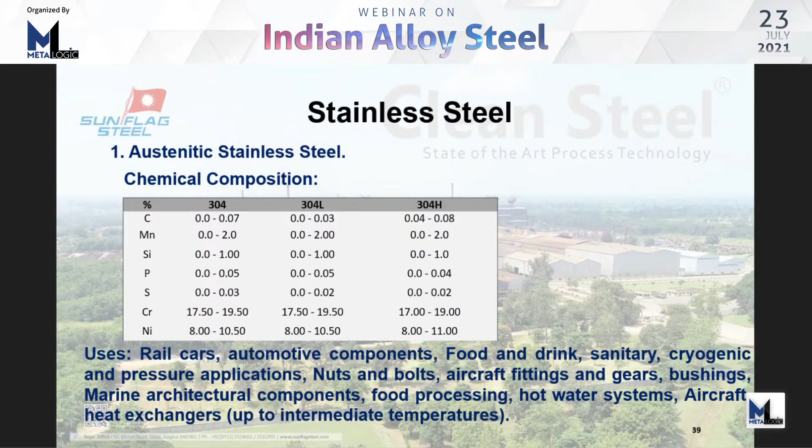The austenitic stainless steel, some of the chemical compositions are given here. It is considered to be the environmental friendly steel par excellence, and it absolutely has no problem about magnetism or rust formation or anything like that. The uses are given herein.

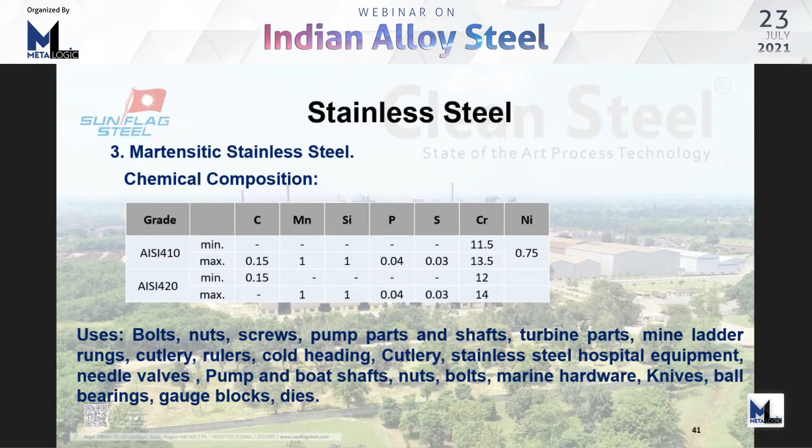Martensitic stainless steels are for engineering applications because they have mostly tempered martensite structure, and the items are indicated here. Duplex stainless steels have very high strength and take care of higher end applications.

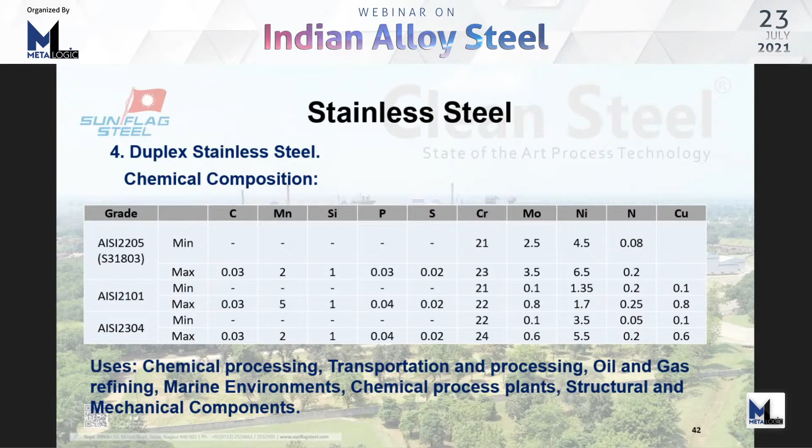Chemistries are given and the uses are given. The precipitation hardening steels, 17-4 PH and 15-4, 15-5 PH. They are basically for very high grade applications like aircraft applications, valve parts, landing gear parts, etc.

Now we come to maraging steel. Maraging steels develop high strength and toughness without losing ductility, and this is achieved by precipitation of intermetallics with nickel as the principal alloying element and cobalt, moly, titanium, or aluminum as the secondary alloying element.

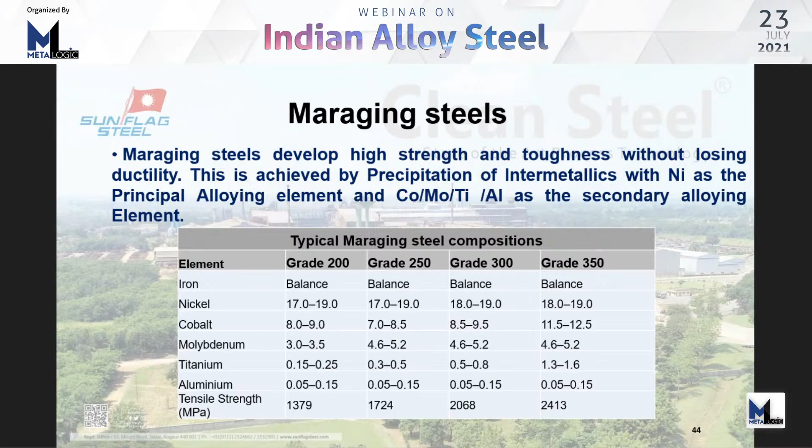You can notice the tensile strengths. They are 2 to 3 times that of alloy steels. The applications of maraging steels are in rockets and missiles, gas centrifuges for uranium enrichment, high wear die components, fencing blades.

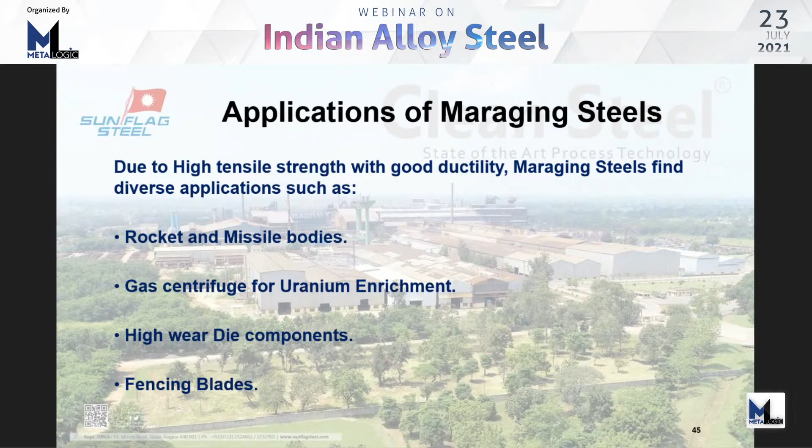Okay, then I would like to come to an important part, which is the clean steel. The clean steel—the performance of steel is dependent on chemistry and cleanliness. All steels have inclusions. Inclusions are non-metallic, affect performance, and have to be removed at the liquid stage.

Inclusions cause premature failures, fatigue failures, and initiate and propagate cracks. Therefore, the process must be designed to prevent formation of inclusions, facilitate macro inclusions to float, and engineer micro inclusions to float quicker. This is the technology of clean steels.

Clean steel technology ensures a process which can consistently produce high quality steel with targeted low gas and inclusion levels.

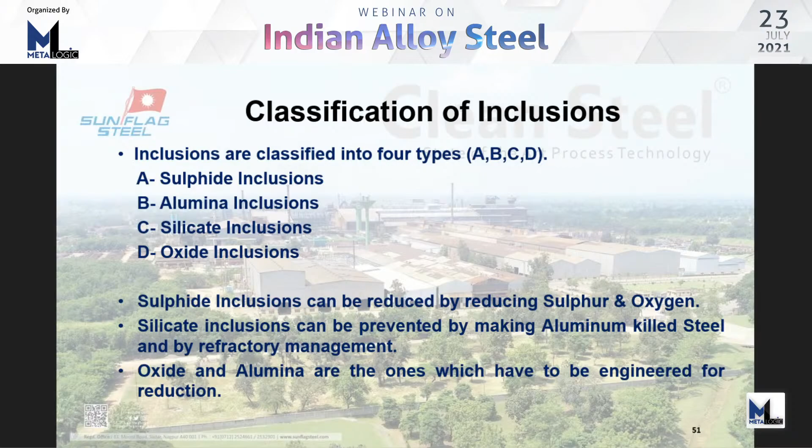Inclusions are classified as A, sulfide type; B, alumina type; C, silicate type; D, oxide type. It is the oxide or alumina which have to be engineered, as sulfide can be brought down by control on sulfur and oxygen, and silicate can be brought down by making aluminum-killed steels.

India imports a lot of alloy steels due to difference in quality and performance. One of the major causes of the gap is the inclusions. With the Atmanirbhar scheme of the government, inclusion management has become the need of the hour.

Sunflag Steel since 2017 has taken steps to make rapid progress in this direction and has achieved low gas and inclusion results. Toward this aim, Sunflag Steel and Daido Steel have been carrying out a joint project at Sunflag.

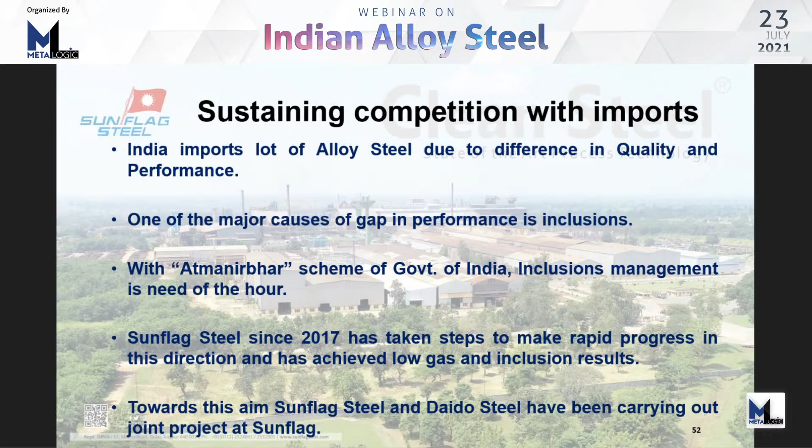These results are obtained in these grades. In oxygen, we have achieved ball bearing steel at 6 ppm and steels for gears and crankpin at 7 ppm.

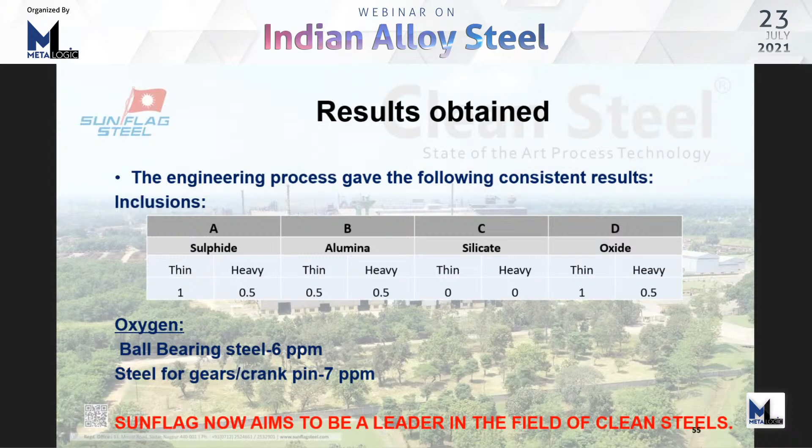Sunflag now aims to be a leader in the field of clean steels. Thank you for your time. I conclude my presentation.